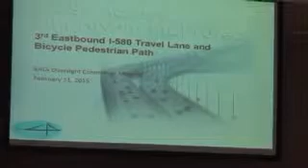There are two items we are asking the committee to take action on. The first is to authorize the Executive Director or his designee to negotiate and enter into a decision document with the California Department of Transportation regarding the scope of the improvements for this project. The second would be for a contract amendment for BATA's design consultant to proceed ahead with the final design phase of the project, concurrently with the environmental planning phase, or the PA&ED phase, using Caltrans terminology.

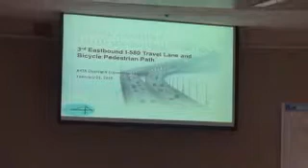So with that, I'm going to walk through a very simple PowerPoint that we put together to outline this. I'm joined here today by Mr. Dan McElhinney, the District 4 Deputy District Director, who is BATA's partner in developing these important projects for the region.

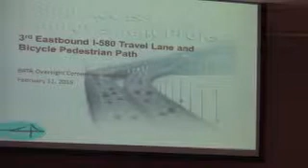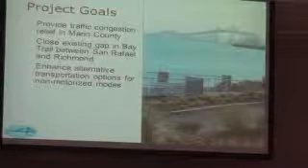I'll just remind everybody that Interstate 580 is a federal interstate, and some of the challenges associated with that are that for the environmental planning phase, everything needs to be consistent with both CEQA and NEPA requirements to implement these proposed project improvements, and that Caltrans is the owner and operator and will ultimately have to approve all of the planned improvements.

The goals for the project are quite simple. We want to reduce congestion on Interstate 580 in Marin County and also close the gap in the Bay Trail between Contra Costa and Marin counties, because there's a significant gap in that regional resource that we have.

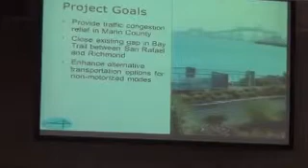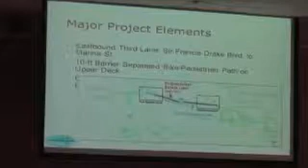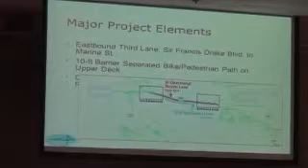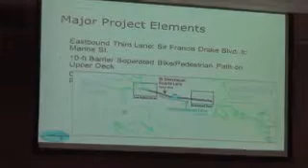The major project elements consist of a third lane in the eastbound direction from Sir Francis Drake Boulevard to Marine Street. Marine Street is the connection to Richmond Parkway within the city of Richmond. There's also a 10-foot barrier-separated bicycle pedestrian path on the upper deck. And though you can't see it on the slide, there's an improved connection for bicycles and pedestrians in the city of Richmond to Point Molate, which basically replaces the bicycle access that exists today using the shoulders of I-580.

The first project is the third lane in the eastbound direction, the congestion relief element of the project. The initial plan is to implement this as a pilot project for a duration of 4 years, open to traffic during the weekday peak periods and evening. There are some highway geometric improvements required for that, which we'll talk about a little later in the presentation.

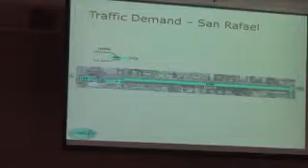One of the things we did when scoping the project was look at traffic volumes for that corridor along Interstate 580, using both the demand volumes, shown as blue arrows, and the actual counts, shown as white numbers beneath them, to determine the logical limits to propose for this third lane. Working with Caltrans highway operations staff, we arrived at the decision to go from Sir Francis Drake to Marine Street. The reason is a rule of thumb: for many freeway lanes, you can assume a capacity of around 1,800 vehicles per hour if you're not looking at ideal capacities.

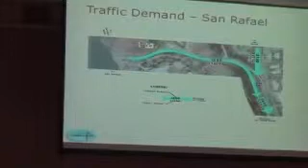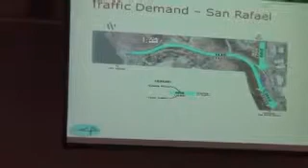For this particular slide, we have about 1,500 vehicles that want to access I-580 in the eastbound direction from Sir Francis Drake, and about 2,000 vehicles that want to use Interstate 580 eastbound. When you combine those two, you start exceeding the actual capacity of the facility, and that's even exacerbated once you add on the volumes from Main Street. Much of that traffic is actually using Francisco Boulevard because of the queues on 580, so once you reach the bridge, you're well over the capacity of a two-lane facility.

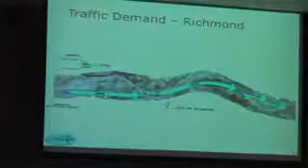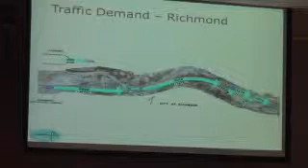This is on the other side of the bridge, within the city of Richmond. As far as the termination of the third lane in the eastbound direction, you can see there is a significant volume—about a quarter of the vehicles that cross the bridge want to exit at Marine Street, many continuing on to Richmond Parkway. That was the reason we felt this was a logical ending of the third lane, because at that point the resulting demand is less than what you would require for the 3 lanes that continue on to the east.

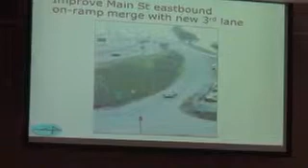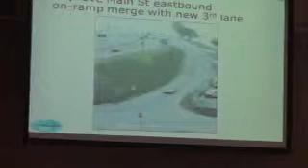Some of the geometric improvements relate to the Main Street on-ramp on the Marin side of the bridge. There's a short merge at that on-ramp today, and with the addition of a third lane, you would be shortening that merge even further. So this is one of the areas we're looking at trying to improve, not making an existing non-standard situation even worse.

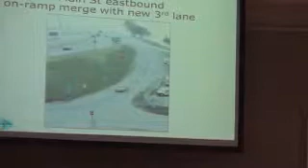For the most part, there are no structural modifications required for the bridge. It really is a relatively simple restriping. Probably the biggest element that would need to be modified would be the addition of intelligent transportation systems, mounting that equipment to the bridge to allow for the peak period use operation. So the signing, the arrows, and dynamic message signing that says when the lane is open and closed would be the main portion required for the bridge itself.

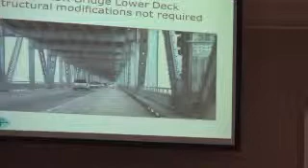Probably the most significant geometric improvement that would need to be undertaken would be the reconstruction of the retaining wall on the Contra Costa side, or the City of Richmond side, of the bridge.

If you can imagine what we're looking at in this picture: on the far left you have a ramp coming on from Stenmark Drive, then you have the two lanes coming from the eastbound direction of 580. Where you see the shoulder on the right-hand side of the photograph, adjacent to the wall, is where we would be placing the third lane. But if you were a vehicle traveling along that shoulder, it would be very difficult to see cars or vehicles around that right-hand curve.

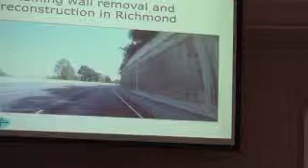So the proposal is to actually remove that existing retaining wall and construct another one further offset from Interstate 580. The good news is that there's actually right-of-way at this location to do that, and right-of-way acquisition most likely would not be required.

This is basically showing where the existing wall is and where the new wall would be. You can see that it is set further back, the new wall shown in green and the existing one in orange.

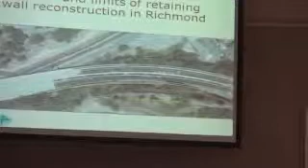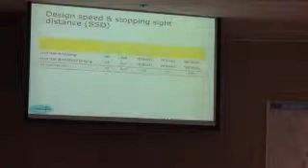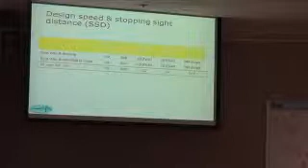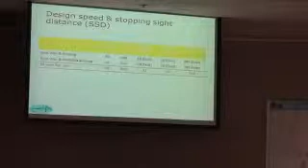This is a bit more detail on what we call horizontal stopping sight distance. There's also a vertical stopping sight distance component. Basically, what you're trying to achieve is to be able to see a 6-inch object in the road far enough in advance to actually stop. If we were to not reconstruct that retaining wall, you would reduce the speed at which you could see that object and still stop from about 50 miles an hour to 43. The current proposal is to accommodate a design speed of 55 miles an hour, which would result in a slightly higher wall than exists today.

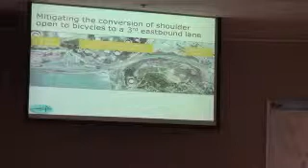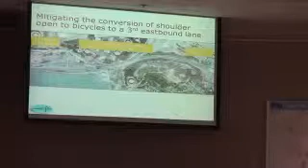The other component I wanted to mention was the improved connection on the Contra Costa side of the bridge for bicycles and pedestrians. Currently, what you're looking at in blue would be where bicyclists can access the shoulder for Interstate 580 on the right-hand side of the aerial photograph. The green is the proposed improved bicycle pedestrian path that would connect to the bridge.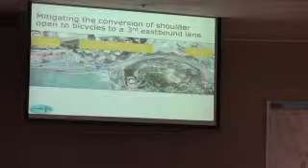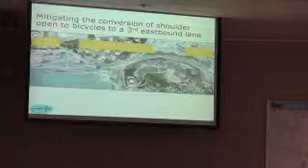Currently, there is no barrier separation between the bicyclists and motor vehicles. This would be a permanent barrier-separated facility that we would be proposing for the Contra Costa side, to replace the bicycle access that would be lost with the addition of the third lane in the eastbound direction. These are a couple of renderings of what that path connection might look like, with a decorative railing fence.

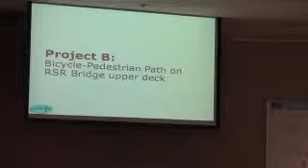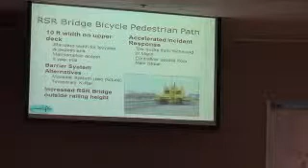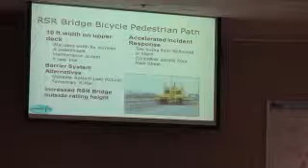The other major element, or second portion of the project, is the bicycle pedestrian path on the Richmond-San Rafael upper deck. We're proposing to separate the bicycles and pedestrians with a bi-directional path, 10 feet wide, using a movable barrier system. The details of exactly what that looks like are still being worked on. One option would be similar to the system that was installed on the Golden Gate Bridge.

This is a rendering of what that 10-foot path would look like on the upper deck. We did entertain some ideas of narrower path widths, which would still allow for a vehicular shoulder, but we felt that to accommodate both bicycles and pedestrians, this was the best option to serve the most users.

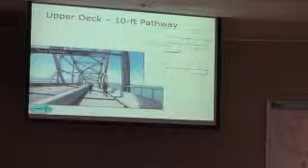Another major element of the project will be handling incidents in the third lane, as well as on the upper deck for the bicycle pedestrian path. So we plan to implement additional CCTV cameras and incident management strategies, to avoid unduly burdening motorists due to the removal of the shoulder on the upper deck for vehicles in the westbound direction.

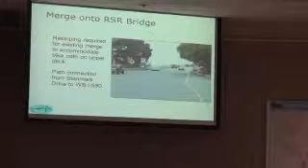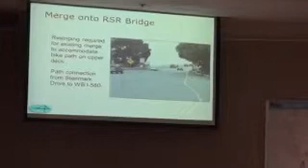The merge from the toll plaza, this photograph is looking west as you're entering the bridge heading into Marin County. This will have to be reconfigured to allow for the additional 10-foot path at the beginning of the bridge, and that's something we're working on with Caltrans design, working out the details of how that connection would actually take place.